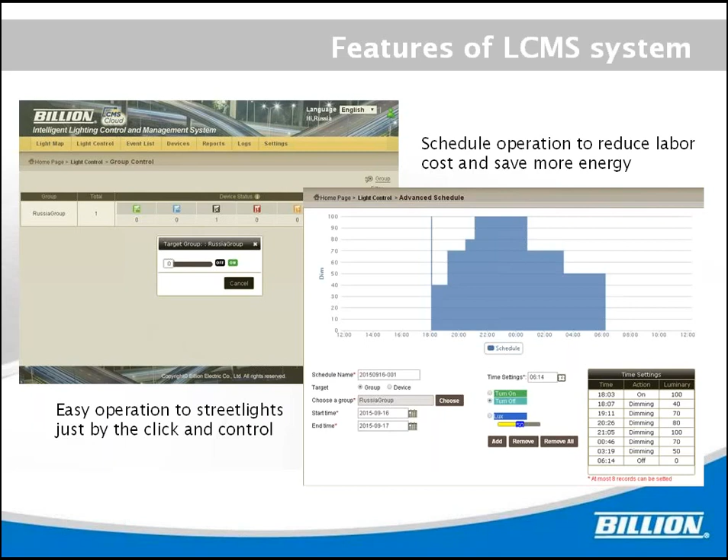And it is very easy to operate the streetlights. We can just click the icons on the map to control the lamp. Later on, I will show you the example.

And also we can monitor the electricity, including voltage, current, power consumption, and the kWh.

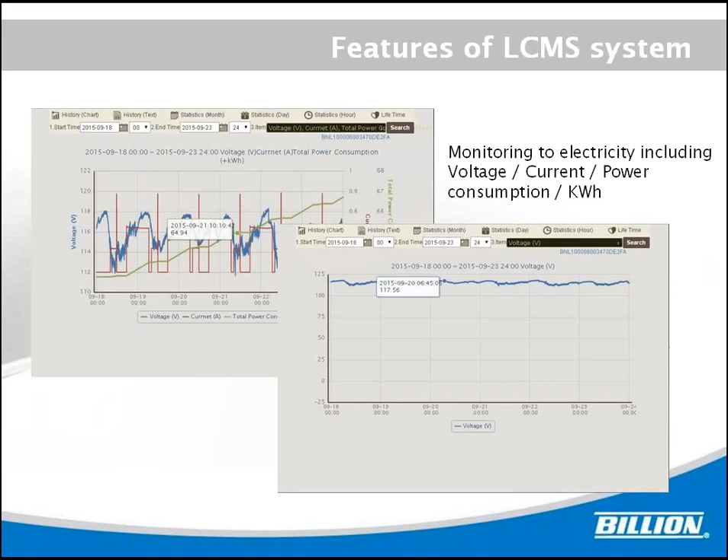And we can also query device lifetime or energy consumption and saving reports. We can show the benefit of smart lighting.

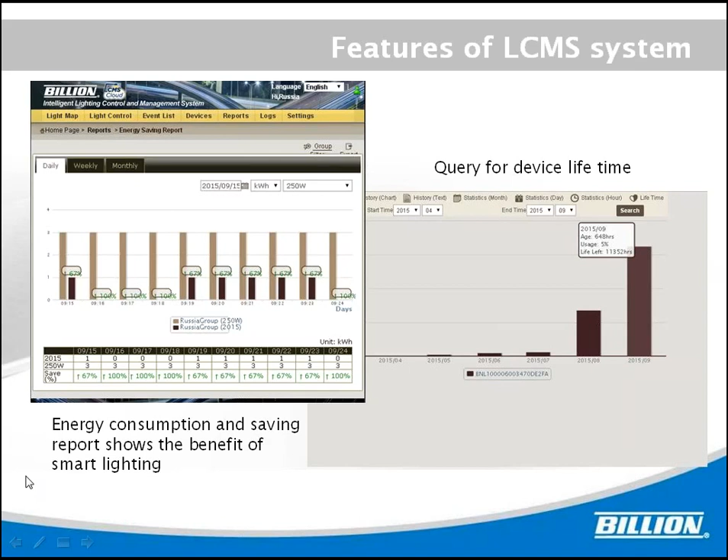And there is also an app developed for the workers for easy installation of the lighting controller. The app can pinpoint the location of streetlights, and it also combines a barcode scanner to scan the device ID or MAC address to store inside the cell phone.

And even the workers can test if the system is running. You can test the lamp to see if it is already powered.

And the solution is award-winning technology. It got the Technology Innovation Award last October.

Billion's broadband power line smart lighting solution integrates broadband power line communication and broadband 3G, 4G, or LTE mobile network with broadband wireless communication to bridge the power line signal. So we had the honor to win the Technology Innovation Award last October at the Taitronics exhibition in Taiwan.

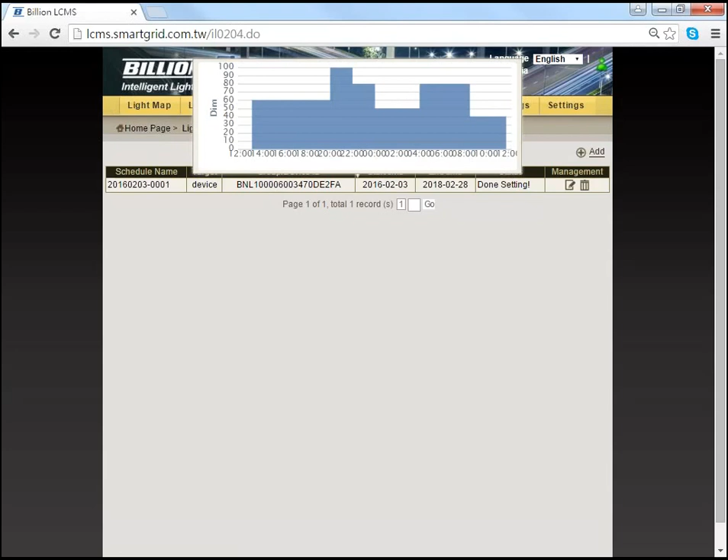And we can see the schedule of the lamp. Right here, for example, the system just shows the schedule of the lamp. Then I can also edit to check the lamp schedule. Now the next operation will be at 8 p.m. It will be turned to 100%.

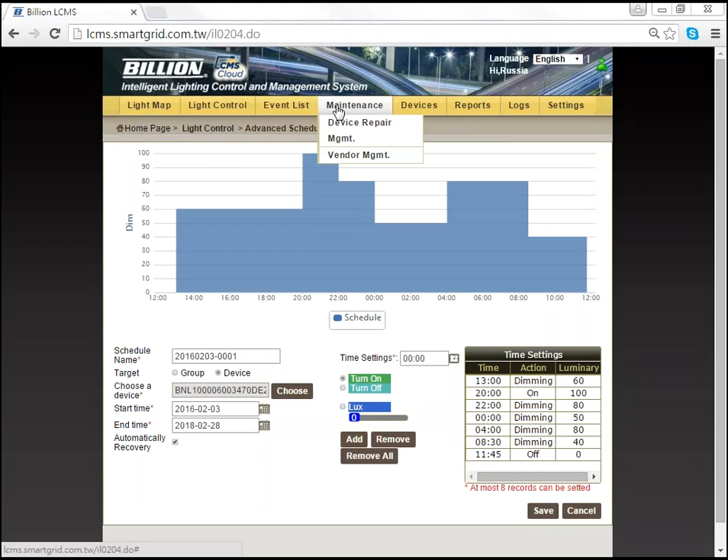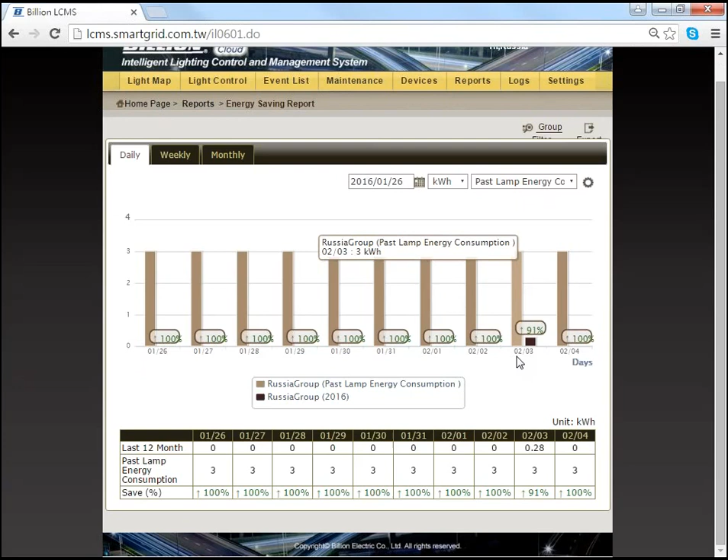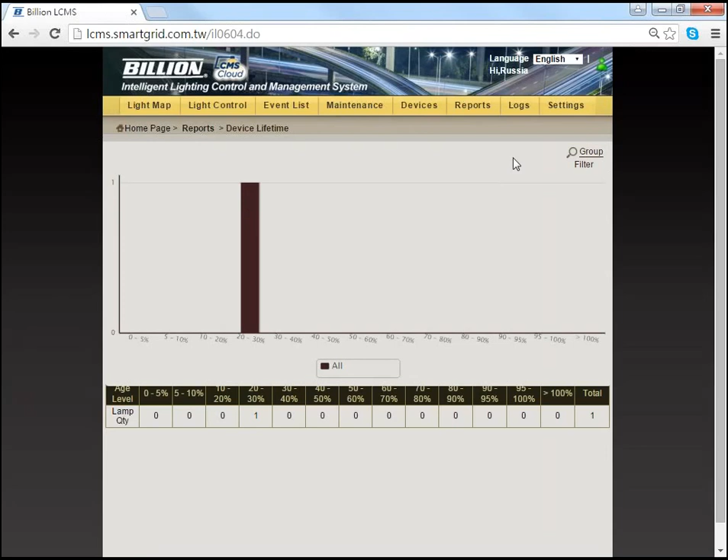And also we can check some information, for example, for the report, energy saving report. We can check how much energy we reduced for that lamp or for that group, and also we can check device lifetime, how many hours of operation or how many hours left. For the availability report, if it reaches 100%, then the system is normally working, no problem. If it is less than 100%, then there should be some error.

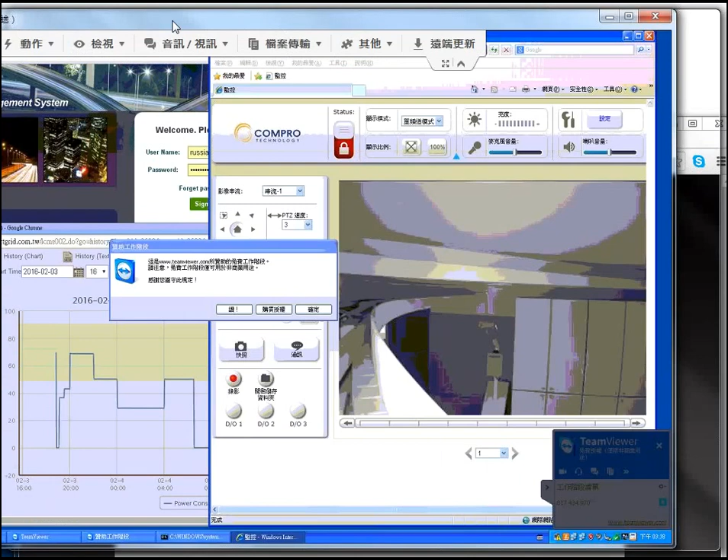Let's take a look at the IP camera. In the IP camera screen you can see the lamp is turned off right now. Then we go back to the system and just click the lamp icon, and it is now turned off, and we can turn it on.

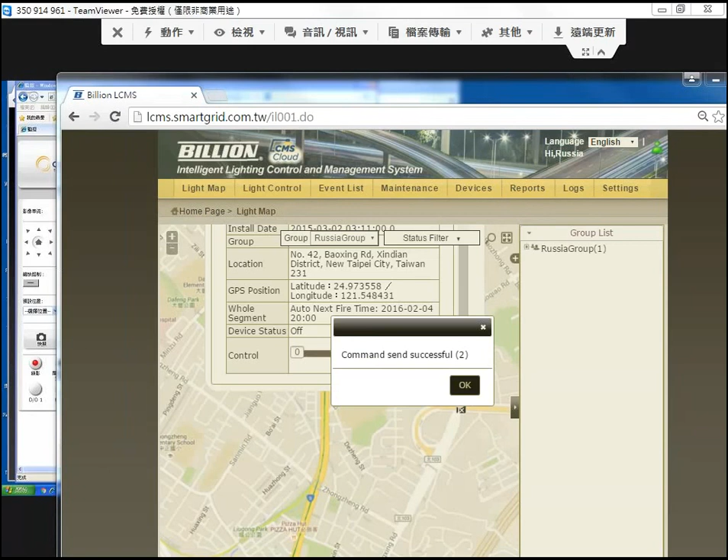I'm going to turn it on. Yes, so the command is sent. The lamp is on. So the command is sent to the cloud system, and our segment controller right here, you can see, the segment controller will receive the command from the cloud, because the segment controller is connected to the cloud system, and the cloud system will give control and give the command to the segment controller, and our segment controller gives control to the smart lighting controller at the base of the lighting pole, and there is an LED driver, and it controls the LED driver to turn the lamp on or off.

So I'm going to dim the street light. I'm going to reduce the screen, then we can see the status by the IP camera. It is now 100%, it is on for now. Okay, I'm going to dim it to maybe 20% only, for LED lighting.

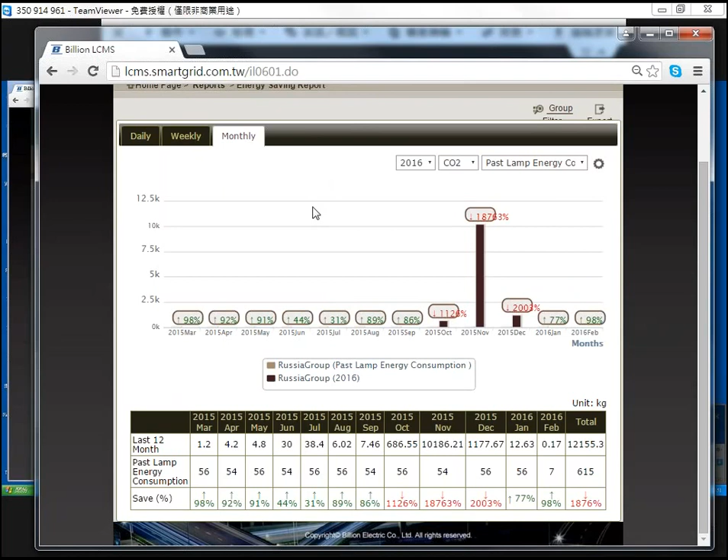And we can choose the electricity in kWh or CO2. The CO2 - how many kilos of CO2 is reduced - is calculated by our system according to the energy power generation and the CO2 emission from the power plant.

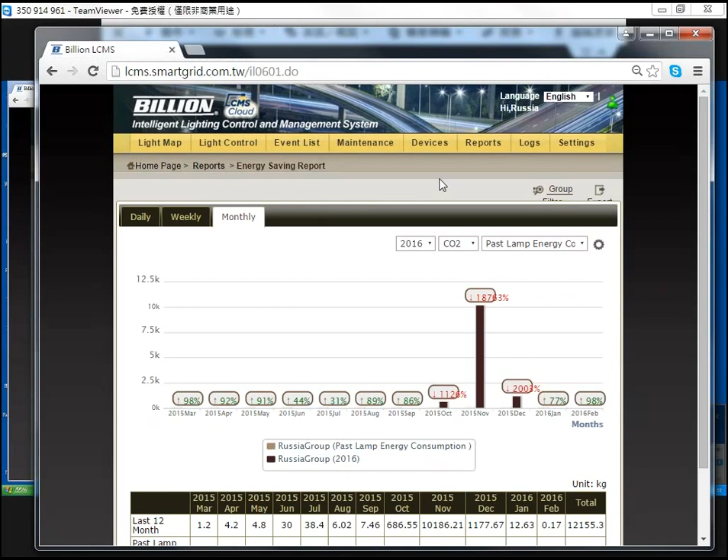And all the logs we can check in the system. Okay, there's no connection logs.

And we can set different members or different roles for the management of the system.

Function menu - I just showed you we can choose different functions for different members or different accounts.

And the interval of the system - because it is a cloud system, we can set the interval, how many seconds are we going to refresh the screen. Because refreshing the screen will increase the loading of the system, we can set different intervals.

And the report manager - yeah, we can turn it on or off. We can receive the report every day because it is much more important for the administrators to know the overall condition of the system.

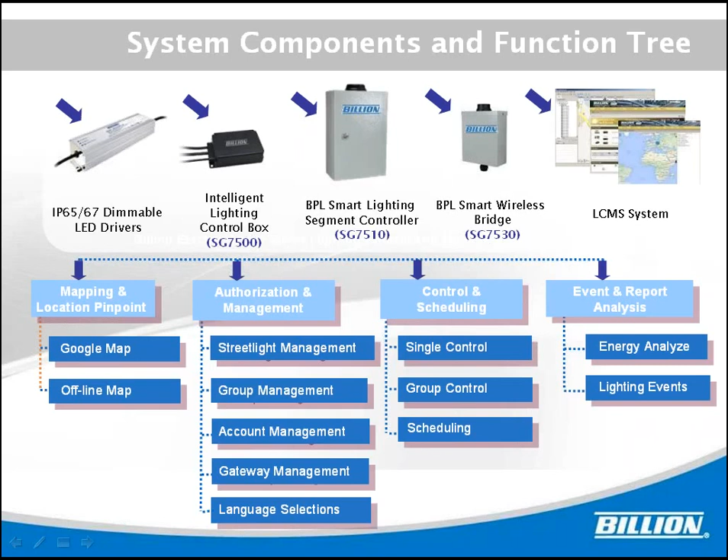Another question is how can we integrate with different sensors or IP camera applications. I'm going to show you this diagram. Normally, the smart lighting controller Billion SG7500 is watertight, IP65 degree, IP65 level, and there is no Ethernet connector inside.

In our segment controller or wireless bridge SG7530, or segment controller SG7510, there are Ethernet connectors inside, because we are using standard TCP/IP. Then we can do some Ethernet connecting inside, for example using an Ethernet to RS485 interface transfer, to do sensor integration. For example, we can sense the temperature or humidity of the city just by a sensor and transfer that into the SG7510 segment controller. We are doing the testing right now, and maybe we will release a new update.